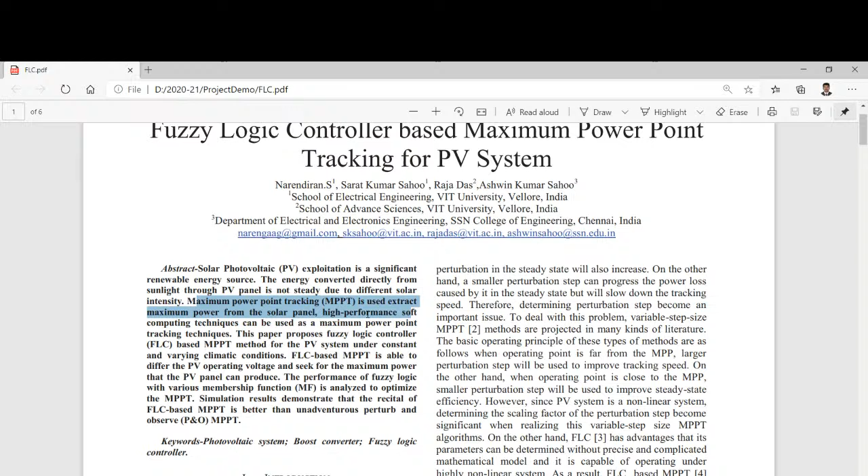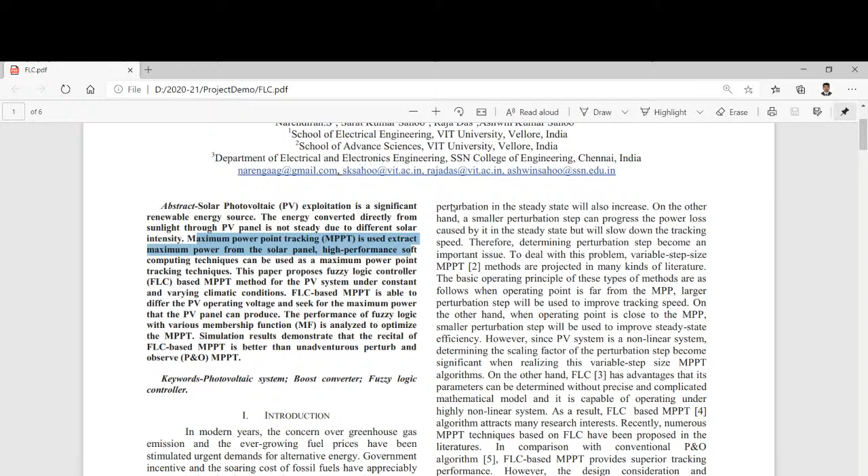When you apply the fuzzy logic controller, it will show high performance using soft computing. Here in the paper, you can see the fuzzy logic controller based MPPT method for the PV system under constant and varying climatic conditions.

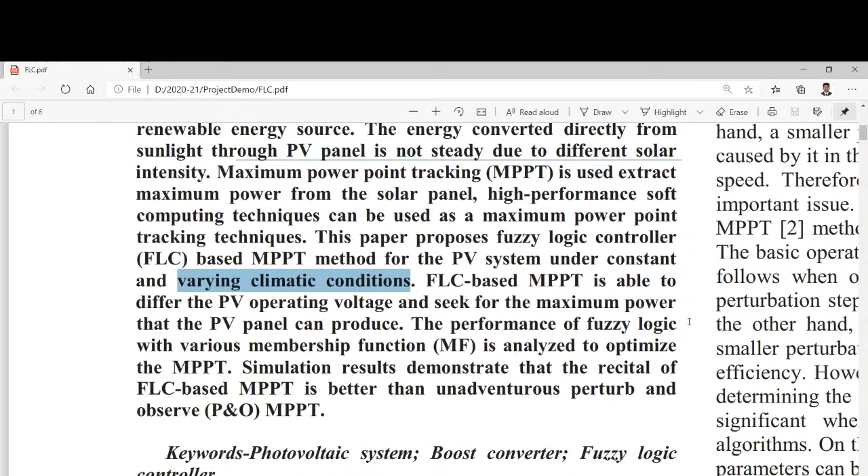Actually the irradiance we get from the solar PV panel is not constant, so in varying climatic conditions and in steady state climate, the fuzzy logic controller will effectively work. The fuzzy logic controller based MPPT is able to determine the PV operating voltage and power that the PV panel can produce, and here the performance of the fuzzy logic with various membership functions is shown.

You need to know what is a fuzzy logic controller and what is a membership function. If you recall, the fuzzy logic controller is not a programming language.

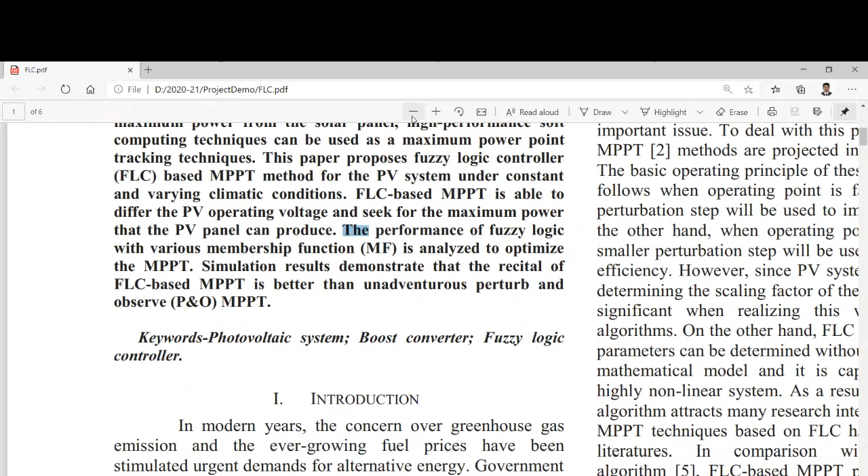It is purely a linguistic variable, though you use numerical equations too. You need to know how to analyze the fuzzy logic controller, how a human will think and take decisions, like when giving a rule-based system using membership, or when creating rules in fuzzification and defuzzification. According to that you need to create the rule-based system, and then it will effectively work.

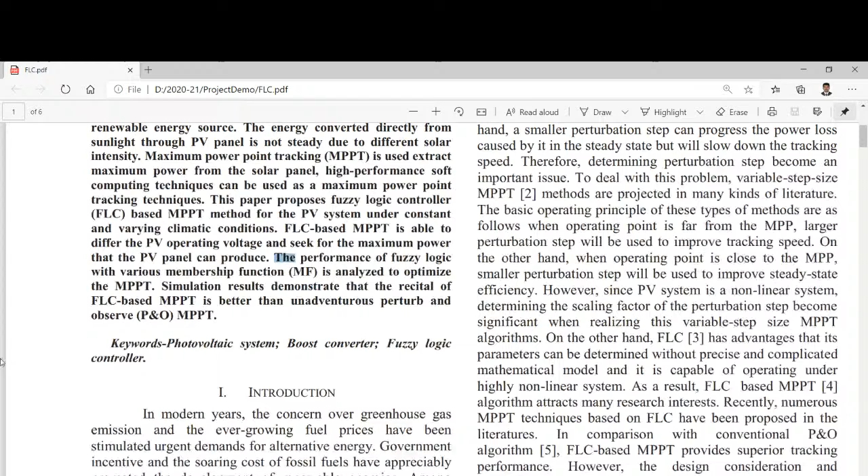They mention why we are going with the solar PV system in modern days, considering the cost of fossil fuels. So no need to go with government incentives - the soaring cost of fossil fuels has appreciably promoted the development of renewable energy sources.

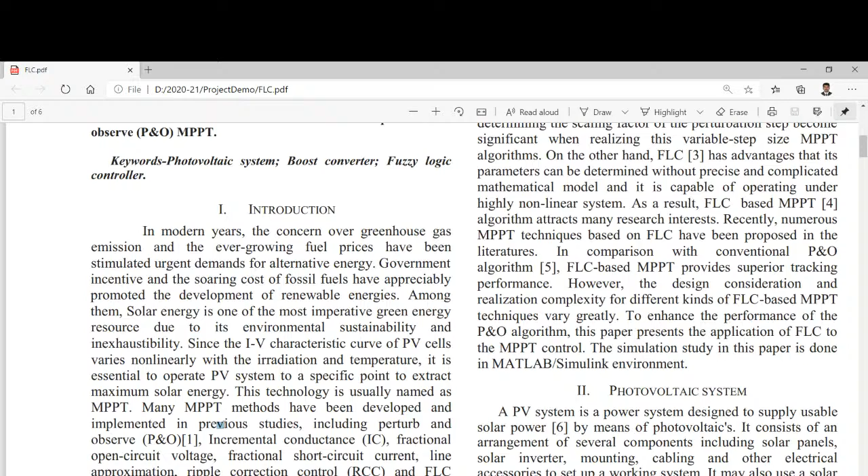Most of the conventional energy sources which we people are utilizing, we are importing from other countries only. So when we are importing from other countries, the prices of diesel or coal may increase, and that ultimately becomes a problem, right?

So in this case, if you go with renewable energy or solar PV panels, you get the benefit because solar energy is free of cost. You need to install the PV system, then you will generate the power - you don't need to pay any taxes to the sunlight, right?

So from here, whatever technology we are implementing, the fuzzy logic controller, they have explained why the fuzzy logic controller and what techniques we have.

Before this fuzzy logic controller, we have perturb and observe algorithm, incremental conductance algorithm, fractional open circuit voltage and fractional short circuit current, and ripple correction control. Apart from the fuzzy logic controller, these MPPT controllers - P&O, INC, fractional open circuit voltage or short circuit current - work at steady state, when you give constant irradiation.

But when you are working on variable conditions, when irradiation changes - whether 1000 or 800 or 500 - the P&O or INC algorithms may still work, but the efficiency will be very low when comparing with the fuzzy logic controlling algorithm.

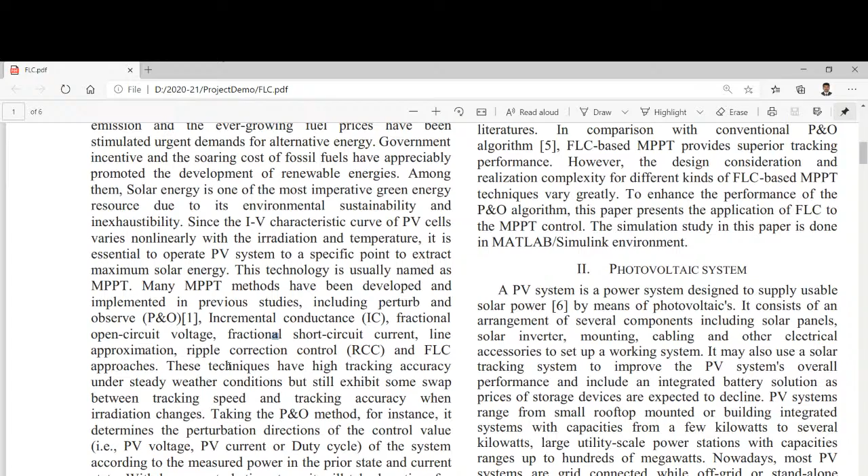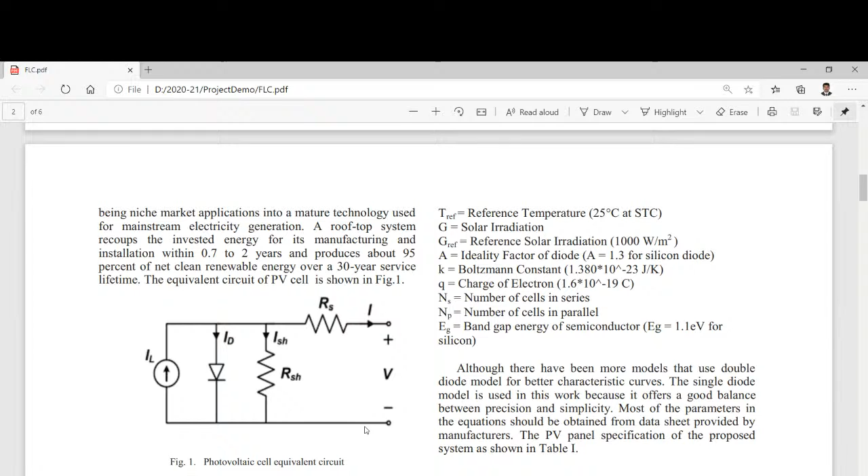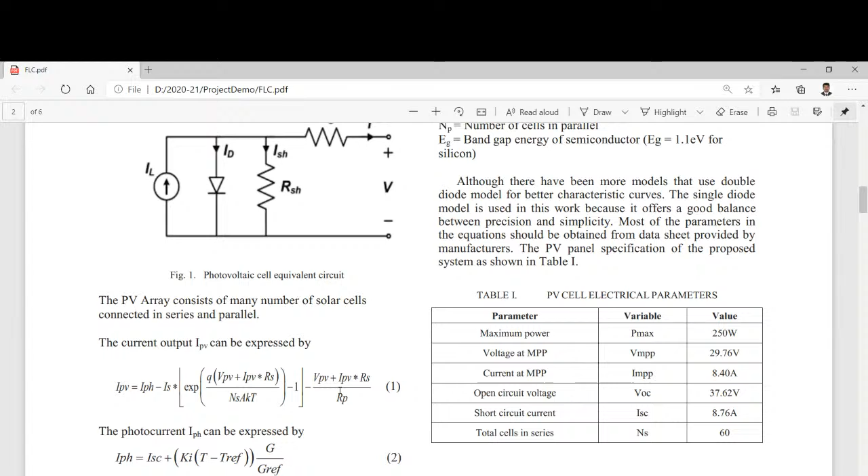If you observe the photovoltaic system, this is the equivalent circuit of the photovoltaic PV panel. Through this equivalent circuit, they generate a mathematical equation for photovoltaic current, and they also give the PV cell electrical parameters.

Suppose you need to work on your own PV panel. Now you have some idea to implement either a 1 kilowatt PV panel, or 2 kilowatt, or 3 kilowatt PV panel.

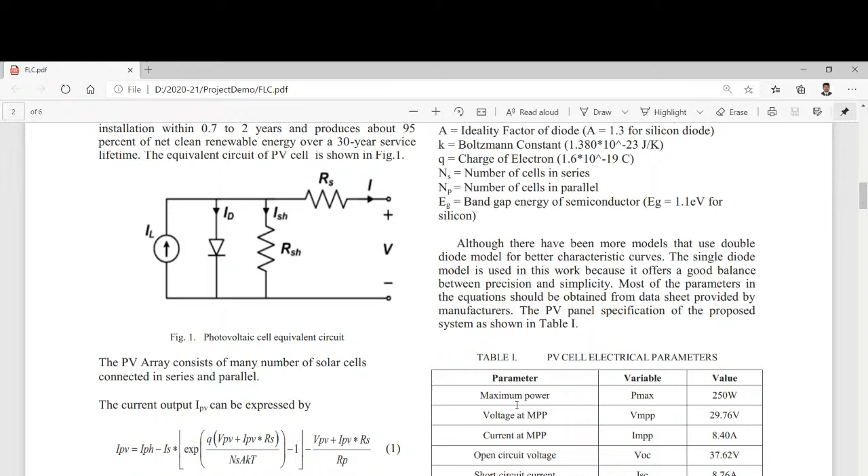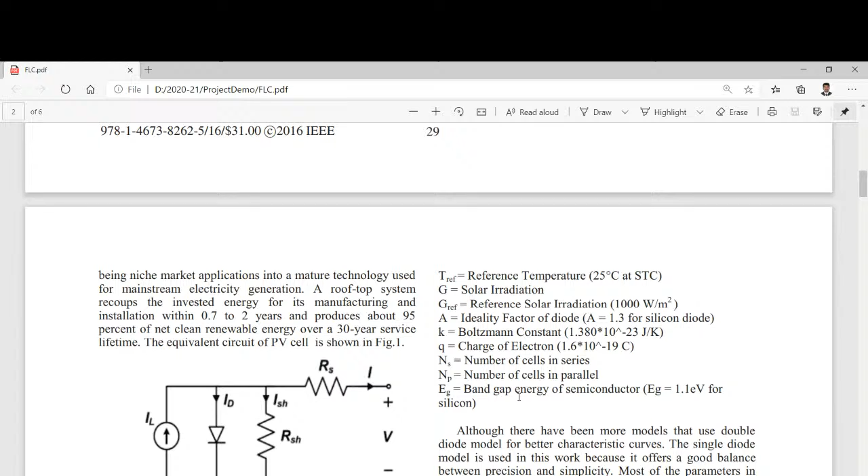You have some idea, then according to that you need to plan the PV panel parameters - how much inductance you need to take. This PV panel, we get from solar, we get DC electricity only, not AC. The photovoltaic energy is converted into electricity based on the PN junction diode principle. If you know the PN junction diode operation, through that only the photovoltaic energy is converted into electricity, and through that we get DC only.

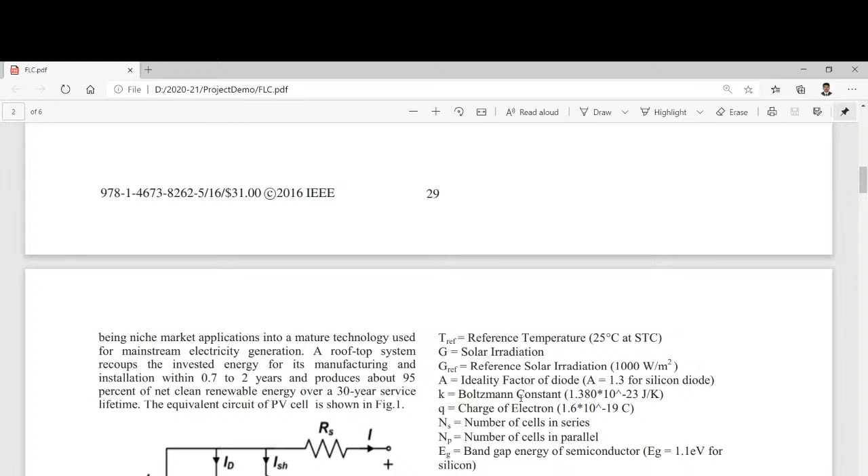But if your requirement is more, say you need 230 AC supply, but due to climatic conditions you get very low power, in that case you use an integrated converter or power converter - either DC-DC converter topology, isolated or non-isolated. Whatever the converter topology, here they are proposing the basic DC-DC boost converter topology.

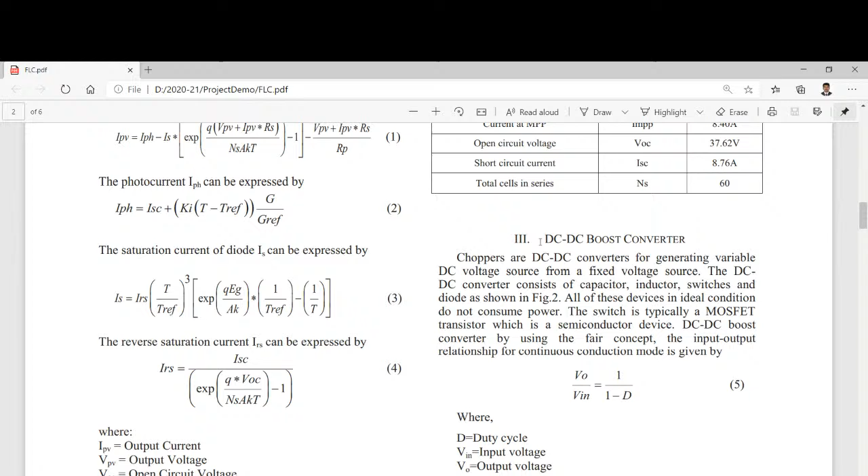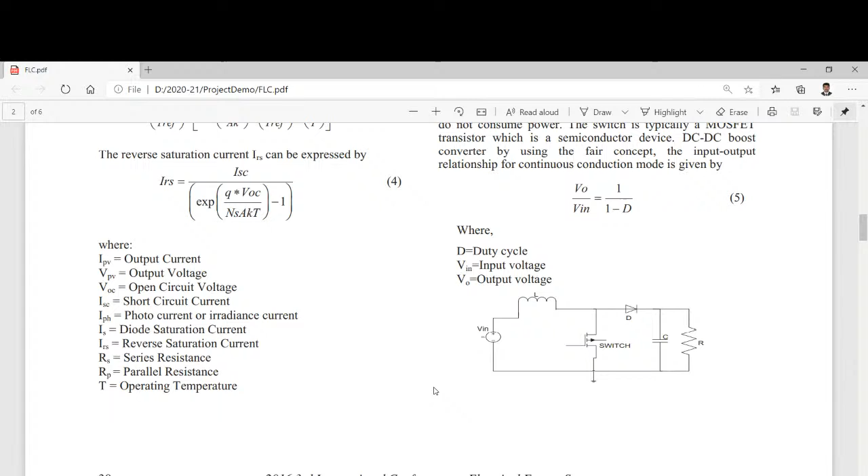By using this DC-DC boost converter, this DC-DC converter topology is a non-isolated DC-DC converter topology. When we send power supply from the source to the load side, the output voltage is always greater than the input voltage. By using this power switch or power electronic switch, we control the flow of power as per our requirement.

Here they designed for 250 wattage - the maximum power they get from the PV panel is 250 watts, and they give the voltage at maximum power point for whatever condition. When designing the PV panel, you need to know the open circuit voltage. If you work on a 250 wattage PV panel, in real time if you need to purchase one in the market, it may cost around 4,500 to 5,000 rupees.

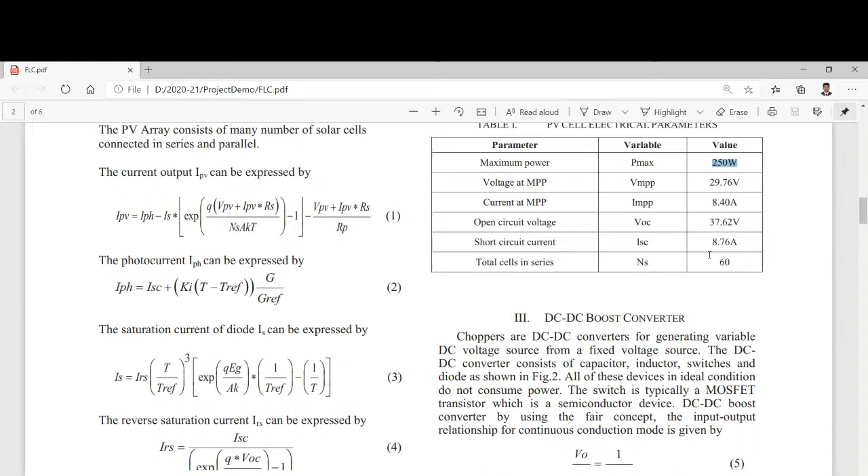So if you need to implement a 250 wattage PV panel or work on this type of product in real time, and you need to reduce the cost but keep the same efficiency, you need to think and focus using some IEEE reference paper, then you can work easily here. And in this case, the DC-DC boost converter, we know very well.

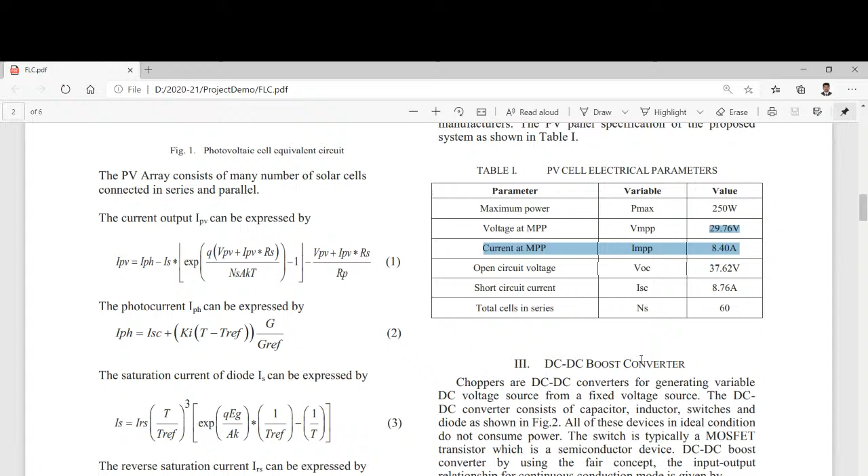In this solar PV panel design, the open circuit voltage mentioned is 37.62 volts, and the voltage at maximum power point is 29.76 only. Even though the open circuit voltage is 37, the maximum for a 250 watt PV panel, even if you give irradiation temperature of 1000, you may achieve only 29.76 volts at maximum power point condition. So when you get 29.76 volts at peak irradiation time, then your solar PV panel or fuzzy logic controlling technique, whatever you are proposing, it will work effectively in this case.

So for the DC-DC converter topology, you know the mathematical equation - here they give V naught by V in equals 1 by 1 minus D. So V naught, the output voltage, is always greater than the V input voltage in the DC-DC boost converter topology. So they give here, and they are preferring the MOSFET switch - at the output you will get voltage more than the input voltage.

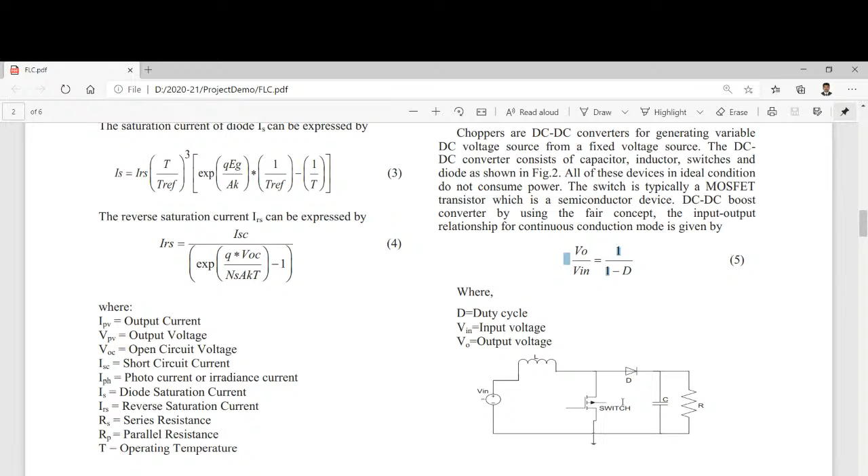This input voltage you take from the solar PV panel - 29.76 volts you take as input from the PV panel. Then you need to improve this 29.76 voltage as per your requirement at the load side, this is the R load. You need to convert this 29 or 30 voltage into either 150, 190, 160, or 90 voltage - according to that you need to plan here.

But when you are working on power electronics, now you know the mathematical approach - if you turn on the switch, what will happen? The inductor will try to charge here, and you will get a closed loop path, right? Here you will get one closed loop path.

You people will get a closed loop path here. If you are turning on the switch, what will happen? Inductor will try to charge here. When you turn off the switch, this is the closed loop path, and the inductor releases the energy. Like this you will get charging, discharging, charging, discharging.

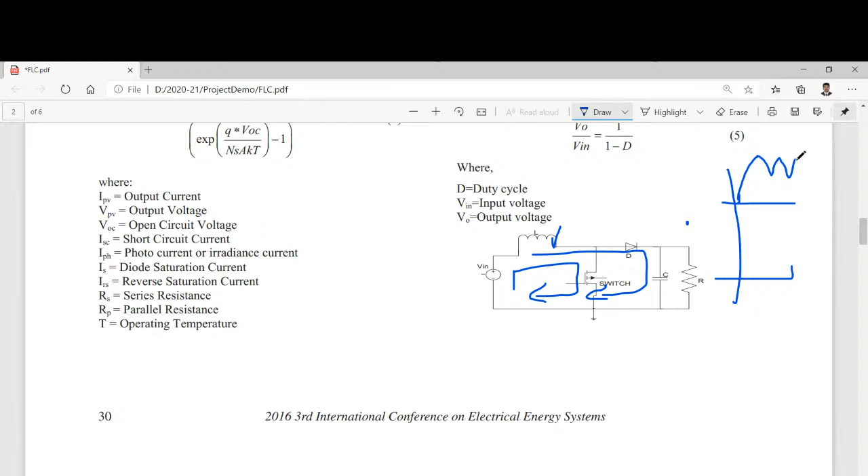But from this switch you generate the duty cycle from the fuzzy logic controller only. From the fuzzy logic controller you are generating the gate signals. So whatever the duty ratio, whether 50% or 60%, you need to observe the ripple condition here. If you are getting more ripples, then you are not sending quality power. You need to minimize the ripples when you are applying the fuzzy logic or whatever the condition.

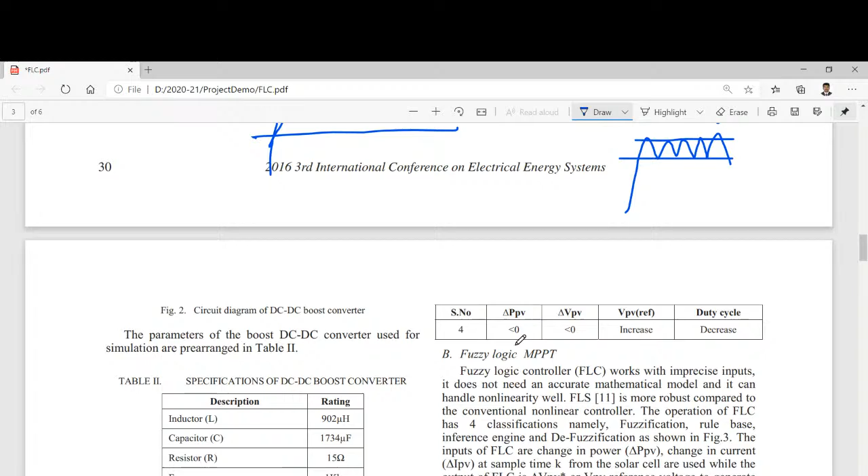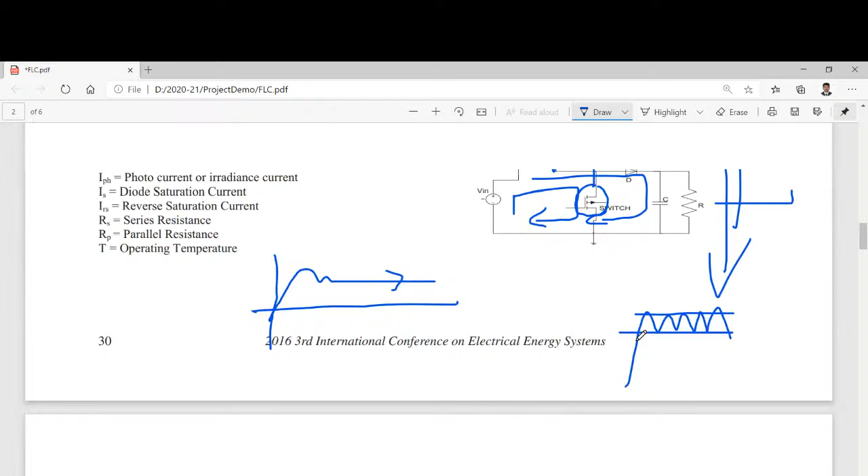You need to get like this. So if it is voltage or current, you need to apply like this. And here they have given the fuzzy logic MPPT also, and in this description they have given the inductor capacitance value, resistance value. How you will calculate the resistance and the inductance - you have some mathematical formula. When you apply KVL or KCL, you will get the mathematical formula.

So you can either give trial and error, but if you are working on a real-time product, then you need to proceed with the exact mathematical operation. It will be a good one, for this inductor, capacitance and resistor.

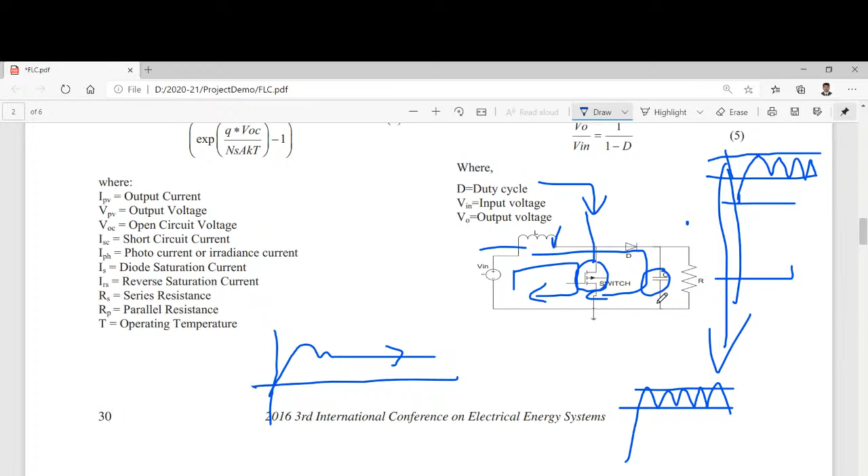So why are we keeping the capacitor before the load? Why are we placing the capacitors? To minimize these ripples. We are placing the capacitors in this case to minimize the ripples here. By using the capacitors, we can minimize the output ripples or output current ripples.

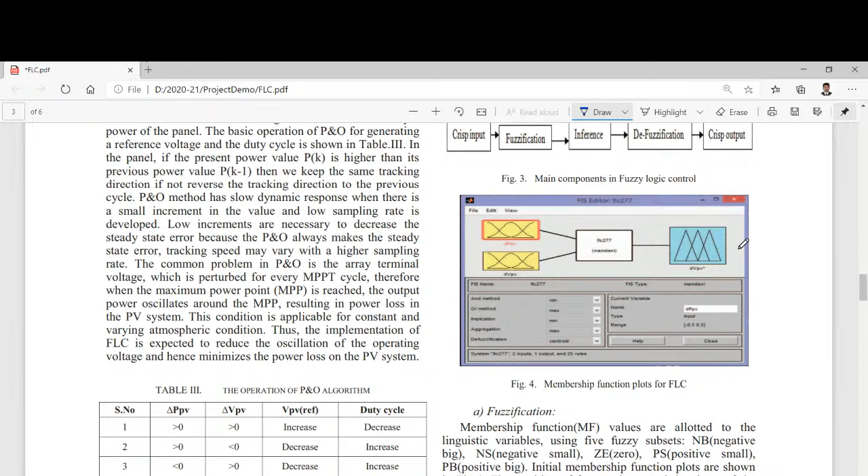And here they have taken the error and change in error condition, and they are preferring the Mamdani type only. Mamdani type, and the output voltage delta Vpv or voltage.

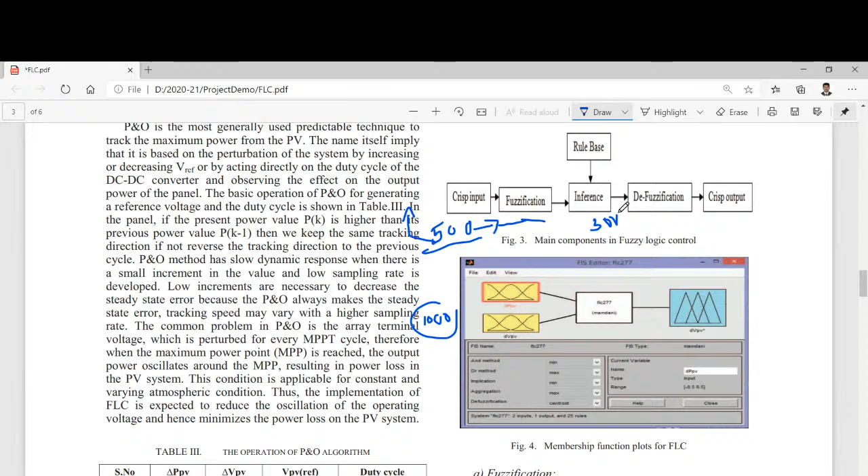Suppose at morning 10 a.m., for simple understanding, the irradiation from the solar we are getting around 500 - just take an assumption of 500. After 2 hours at 12 p.m. you may get 1000 irradiation. When you are getting this 500 irradiation and the open circuit voltage 29 point something or 36.72, you will get maximum 30 voltage nearly. When you are getting solar intensity 500, you will get that 30 voltage maximum from the PV panel. Will you get 30 voltage maximum? Definitely not, right? So definitely we can't achieve 30 voltage.

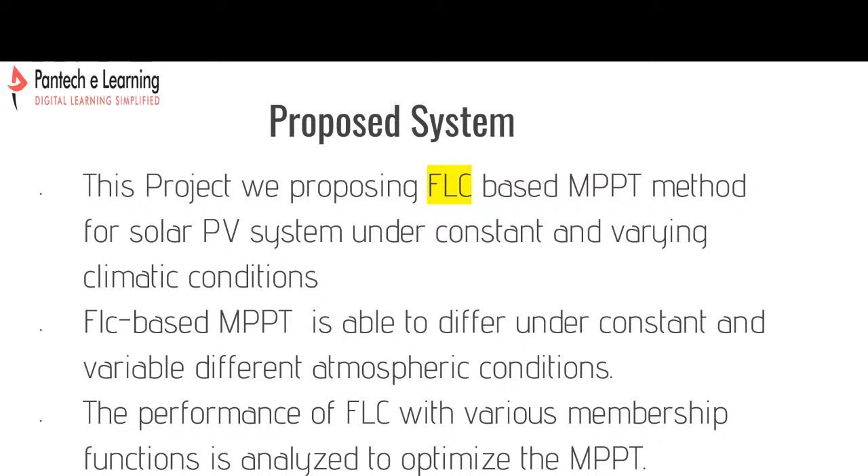In the solar PV system we have different types. If you are simply working on 250 watt or 1 kilowatt, you need only 3 PV panels. But if you are working on a centralized PV system like a big grid connected system, mini grid, or standalone PV system application, the fuzzy logic controller needs to work differently since in a big centralized PV system you have a number of PV panels.

In those systems, PV panels are connected in series and parallel manner. When you connect a number of panels in series connection, the shadow problem will occur, and you will get PV panel insolation mismatching problems. When connecting panels in series, you can't get the same irradiation and temperature from the first PV panel and the 10th PV panel - you will get different irradiation. So in that condition, you need to tackle where you are getting exactly the maximum power.

This type of algorithm is more useful when humans face difficulty understanding the problem and more complexity arises. In that case, the fuzzy logic controlling algorithm will effectively work here.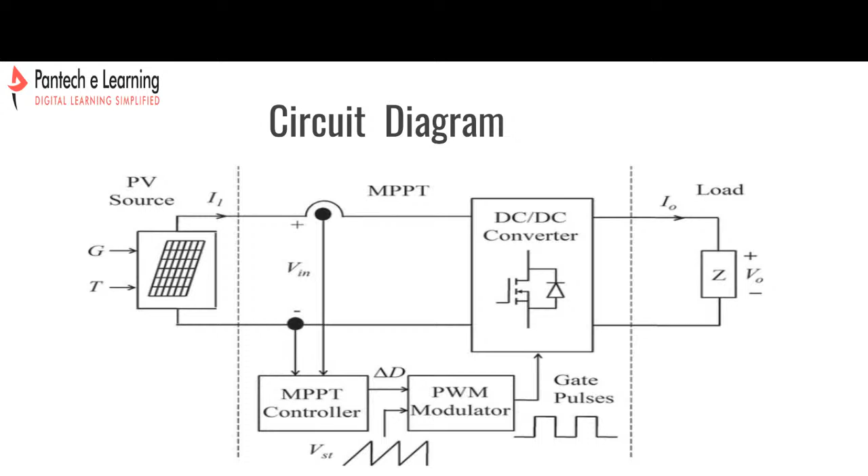Then we are connected to a particular load here. This is the circuit diagram of a fuzzy logic controller based MPPT solar PV system. This is the control diagram, and here the block diagram you can see here.

The block diagram, suppose whatever you are proposing in the Simulink model, if you are working on a particular product, the Simulink is a physical model actually. So whatever you people are imagining, you are designing that model in the simulation. After designing and testing that model in open loop and closed loop condition, then you need to proceed with the hardware.

So you need to analyze the test cases. You need to work on 2, 3, or 5 to 6 test cases. Then when you are getting confident, this particular product we can implement in hardware. So then you can go with the real-time prototype board hardware also. You need a PV panel and the DC-DC converter, step-up converter.

Then here you are connecting with one R load, and here the fuzzy logic controller, whatever we are proposing now. So the same fuzzy logic controller, when you are working on hardware, you need to go with the microcontroller techniques. In that microcontroller techniques, you need to dump whatever program you are designing, whatever the rules.

In simply prototype board manner, this fuzzy logic controlling algorithm we can't implement. But in a real-time product, definitely we can implement the fuzzy logic controller, and this is the microcontroller only. In this microcontroller, we need to generate the gate pulses.

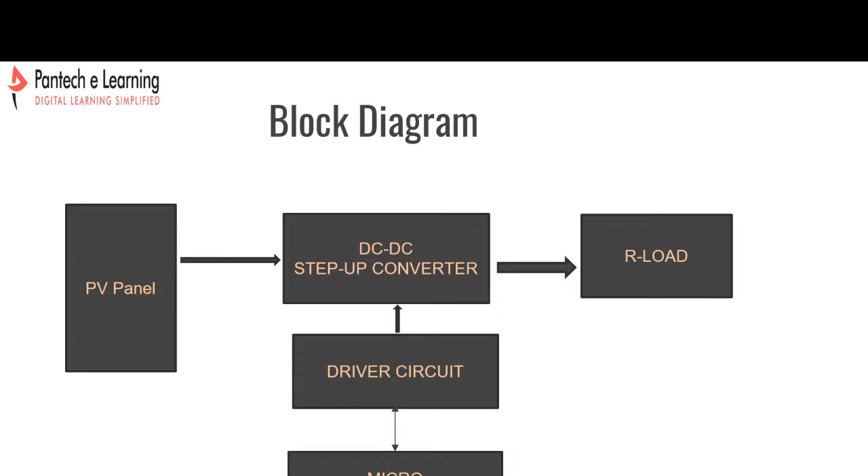Then you can measure through the CRO, you can see the waveforms also, and the DSO also you can prefer. So then according to your requirement, you can do the prototype board this type of models. And the algorithms here, we are preferring the fuzzy logic controller, right? So the fuzzy logic controlling algorithm is the main thing here we are doing.

Pre-processing, so we need to set the rules. Suppose for simply understanding the fuzzy logic controlling algorithm, how it will evaluate and how it will track the maximum power point, you can see a bunch of people, you people went to a good restaurant.

This fuzzy logic controller was proposed by Lotfi Zadeh, a professor at an American university, around the 1960s. When he proposed it, he was observing his surrounding areas.

Mostly in the United States of America, people do not cook food daily. They often go to restaurants from morning or afternoon, and will not cook on a daily basis. But in India, we people cook every day, right?

So he observed the people, then gave a best example. When a bunch of people go to a good restaurant, at the end, when you are leaving, you try to pay the tip, at least when you are satisfied with the food and feeling more comfortable. If you are enjoying the experience, you give some tip to the people. So when you are trying to give the tip, you analyze something, right?

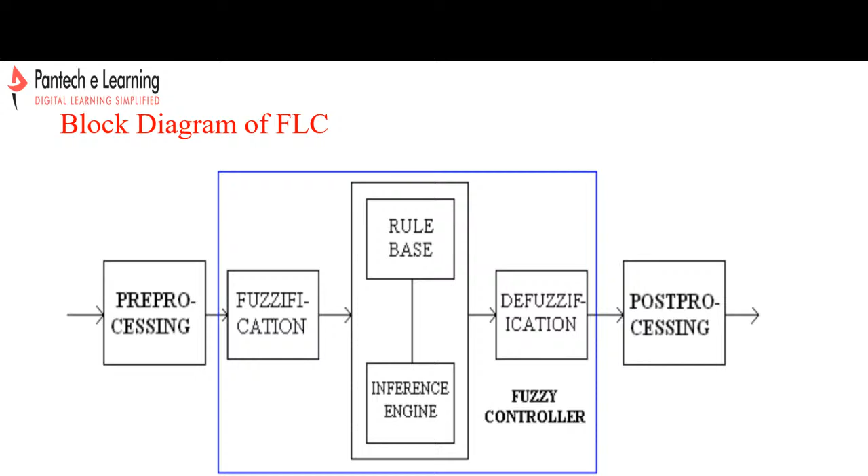So like we are thinking now, when you have two options, service and quality of food, as a human we take the decision on the spot. We are taking the decision and giving a tip according to the situation. Similarly, when you give a rule-based system in the fuzzy logic control algorithm, when you create the rules, the machine automatically gets the capability to take decisions according to the situation.

When the irradiation condition is around 1000 or 500 or 800, how will it act, how will it take the decision, how does it get the duty ratio for your particular power electronic switch or power converter - it will take the decision here. And here are the steps you need to follow.

Identify the inputs and their range, and name them. First you need to identify the inputs. When you are creating the fuzzy system, you need to identify the system, then identify the outputs and their ranges and name them. So create a degree of the fuzzy membership function for each input and output.

Suppose you have eaten or not - you have two options only, either yes or no. But when you are working on a power electronic switch, either yes or no means the switch will be on, which you can consider as 1. If the switch is off, you consider it as 0. So in between 0 and 1, you can create infinity ways - the rules you can create in infinity ways.

Then the machine or the PV system will take the decision on how to apply this depending on the irradiation. So the input fuzzy logic membership functions - the input to the fuzzy logic is given as a membership function, which is called a linguistic variable.

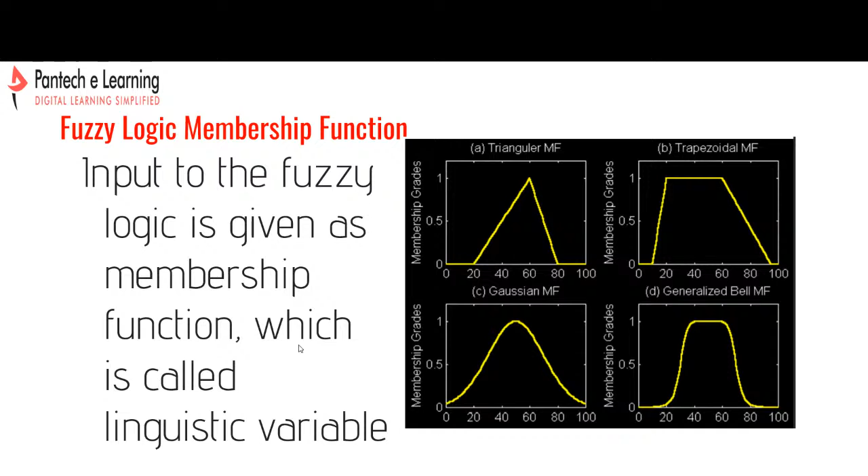In this membership function, we have different types of membership functions: triangular membership function, trapezoidal membership function, Gaussian membership function, generalized Bell membership function. We have different types of membership functions. Depending upon your wish, you can take the different type of membership function.

If you need to create more number of rules, that means your system becomes more robust or stronger, then you can go with increasing the number of rules. If you are working with a low wattage converter topology, then you can go with less number of rules in this case.

Suppose how you will turn on your fan at your home application. As a human, the fuzzy logic also in this case we can apply. If the humidity or temperature condition outside of your home is more, then you will increase the fan speed. If the temperature condition is very low, then you are decreasing the fan speed. So now you are taking the decision, right? According to the situation, the humidity or temperature conditions in the atmosphere at your home, you are taking the decision either to increase the speed of the fan or decrease the speed of the fan.

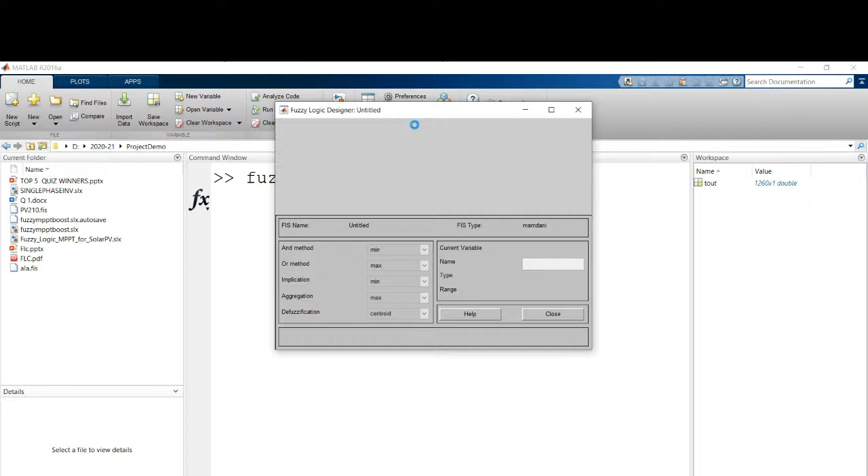You can see here, this is the fuzzy logic designer file. I will show how, for the 210 wattage PV panel, we are creating the rules.

In this file, first when you open the fuzzy logic designer editor, you need to give the names — input and output. Suppose in this case we are preferring two input variables. So you go to Edit, Add a variable, Input. Adding a variable input means you will get another input variable.

Now you can see here, this is V — you can consider this the solar input voltage. This is the solar input current, input voltage and input current. Then you need to get the duty ratio as output.

Here, in input one, you give the name V, meaning voltage. Input two, you give the name current. And the output, you mention duty ratio or D — D equals switch-on divided by switch-on plus switch-off, that's how you calculate the duty ratio. So then voltage and current.

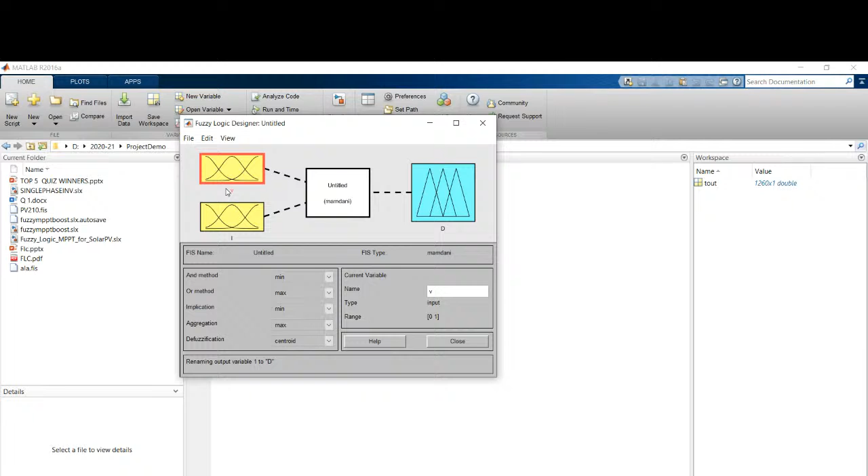If you are observing here, we have the membership function. If you double click here, now you can see the membership function editor. In this membership function editor, you can observe the details.

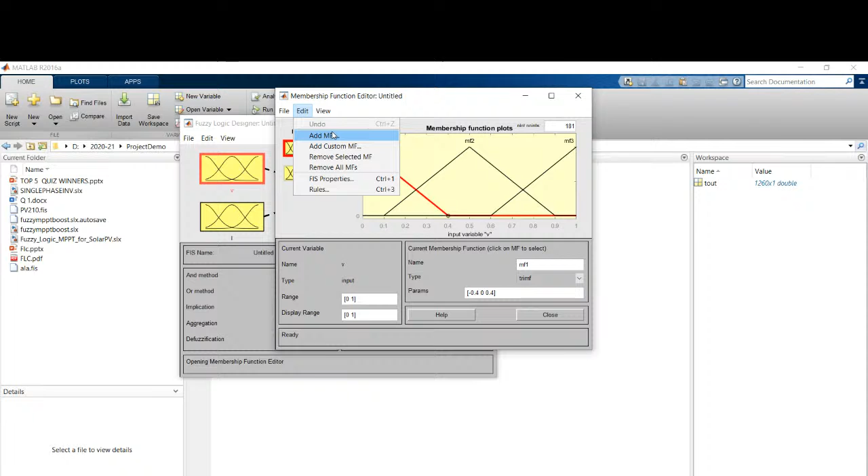So you can see here the membership functions. If you need 3 membership functions, you can select. If you need more, you can add a membership function, or you can remove all the membership functions here itself. Then if you need more, add membership functions. You have deleted all the membership functions. Now you need to edit the membership function.

Now you can see here which type of membership function you need to add: either triangular, trapezoidal, gbell, gauss, gauss-2, sigma, or dsigma membership function, according to your requirement. So in this triangular membership function, if selected, then the number of membership functions here you have selected 5. Apply and OK.

Now you can see here you will get the 5 membership functions. So in this membership function, you need to fix the range actually. What is the voltage range? What is the current range you need to fix? So then you need to give negative big, negative small, negative medium, zero, positive small, positive big. In between -1 to 1, we can create infinite rules here.

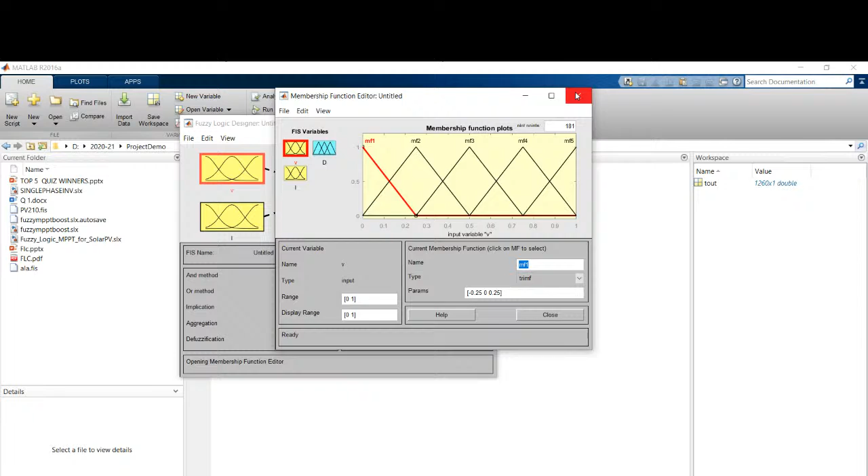So the membership function 1 name, here you can change. And for membership function 1, what is the range also here you can adjust, or parameter range also you can give. So here I will show, and whatever data we created, I will show it.

Wait a second. Now you can see here the file. When you are creating the rules, import from the file. So the 210 wattage PV panel rules, how we created, I will show here.

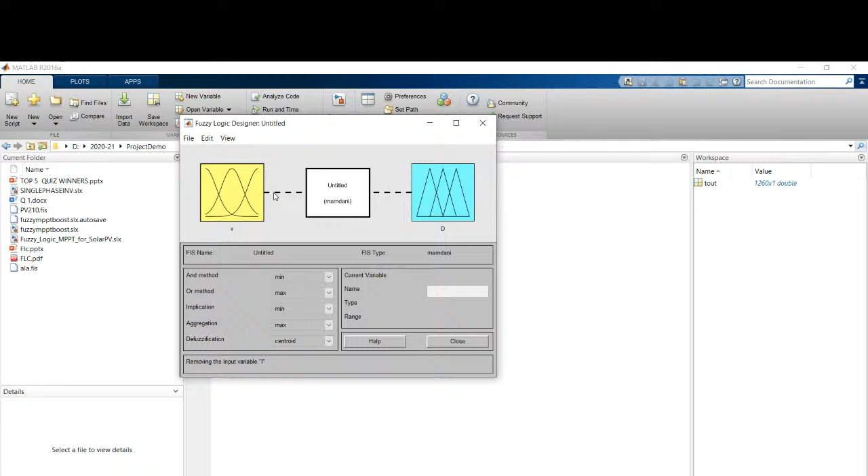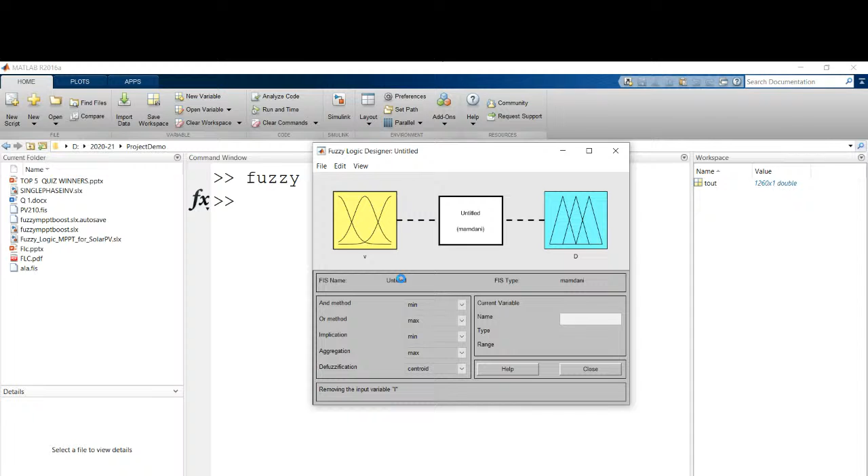So if you are creating the fuzzy file, you will get the file in FIS format only. Fuzzy file you are getting: PV210.fis. So open the fuzzy file. So you have imported the data to this fuzzy file.

Now you can see here what I said: voltage, current and duty cycle. Now in this case you can see here how we created the rules. The fuzzy logic rules you can see here.

So in this case the membership function type, trapezoidal membership function we have taken, and the range here 0 to 37. Voltage range, actually the input voltage range, why specifically we have taken range 0 to 37, I will also tell. Range here, the voltage range 0 to 37 and the low voltage range.

So now you need to select the low voltage range: 0, 0.5, 0.46, 10.09. And the medium voltage, what is the medium voltage? The medium voltage range here you can give your requirement; how you are thinking, 9, 15, 22, 29 we have taken. And the high voltage range 28, 31, 37 we created. This is the voltage range actually, 0 to 37, the PV voltage range we are getting.

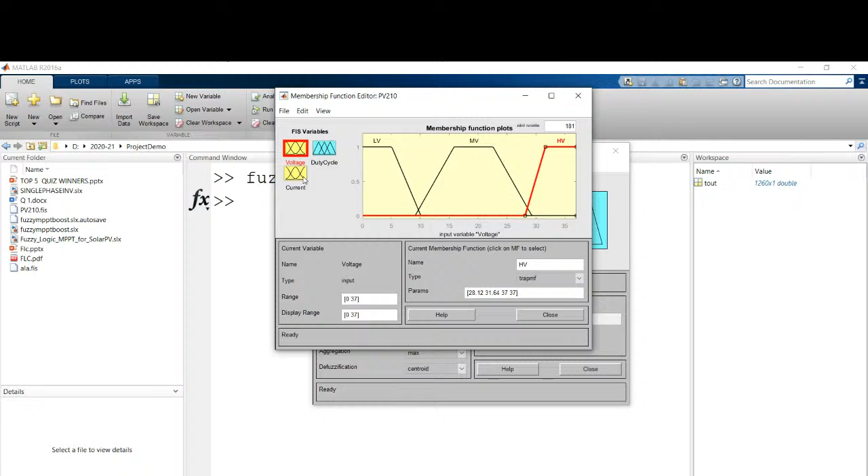And the current here you can see, the range of current here, 0 to 8 we selected. 0 to 8 we selected: low current, medium current, high current.

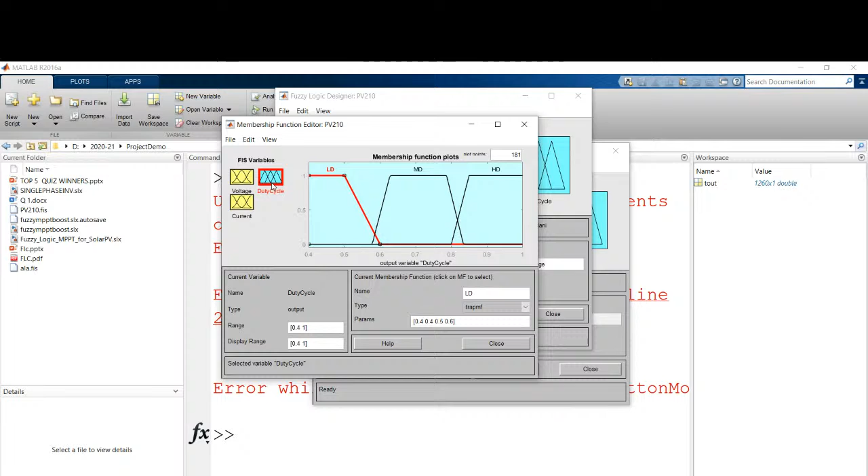Voltage and current, according to the situation, according to the irradiation and temperature you people are giving, the voltage and current will vary, but you need to get the maximum DC link voltage. From this DC link voltage you need to get the duty ratio. So this duty ratio here we are giving.

Now you can see here, I will export whatever data we created, import and export to a workspace. Here we have file, export to workspace. So now this data directly went to a Simulink file here.

So now here there is a fuzzy MPPT, I will show here. Fuzzy MPPT solar PV system, I will show the toolbox here. Wait a second. The PV panel, 210 wattage.

In that PV panel, what is your open circuit voltage? You need to go through that open circuit voltage. The open circuit voltage here we are given is 37. 29 is the maximum peak power point I need to achieve. Maximum voltage I need to achieve, 29 voltage I need to achieve. According to that, you have created the fuzzy logic rules in this case.

So here I will show the fuzzy MPPT DC-DC converter topology, and in this case you can see the rules also, and you can see the graph also, the surface viewer graph also you can see in this case.

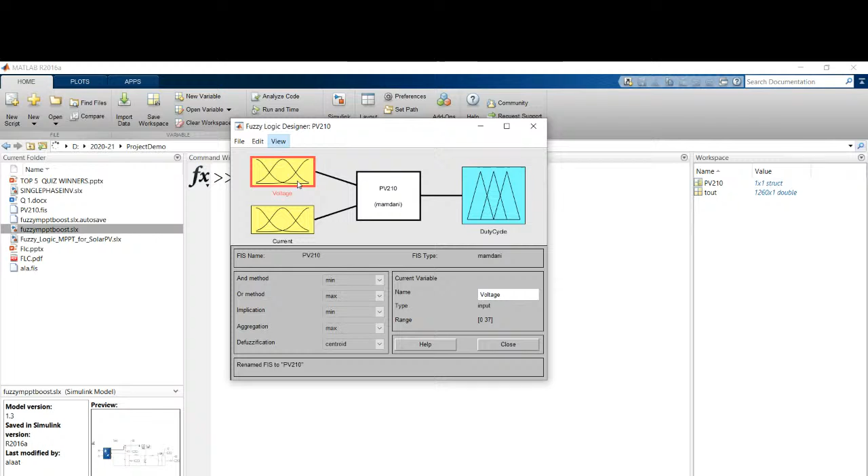Well, wait a second. So actually it's taking time.

This fuzzy logic and DC-DC converter we did, then the MPPT. First we need to create the rules. Then in the Simulink library browser we have the fuzzy logic toolbox. In that toolbox we can take the fuzzy logic controller and the fuzzy logic controller with rule viewer block also.

Whatever the name, when you are saving the file after creating the rules, you can save it with the PV panel 210 wattage name, or with your own name. You can give whatever variable name, whatever file name, and it will consider that. When giving that fuzzy file name, you need to observe whether that fuzzy file is available in the current folder or not. If it is available, then you can import that data very easily.

So now you can see here the fuzzy logic controller rule viewer I took here.

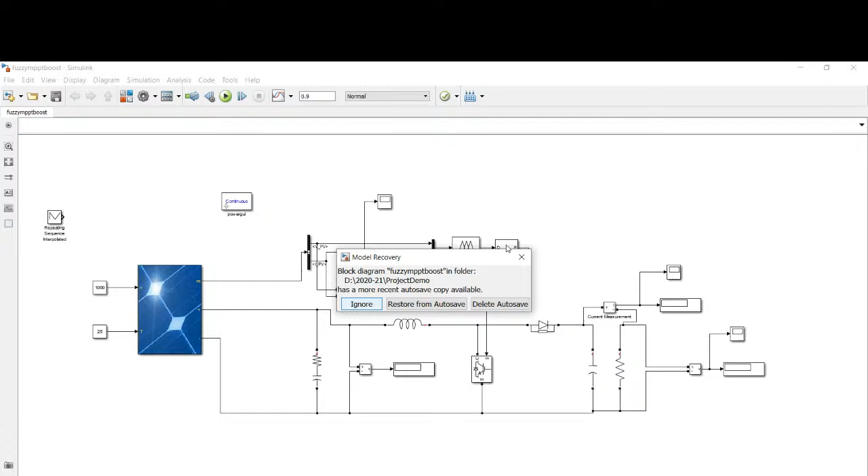You can see here, this is the boost converter topology. In this boost converter topology, the PV panel I selected from the library browser. We can select the PV panel, and you can see how I selected a single panel only here, 210 wattage PV panel.

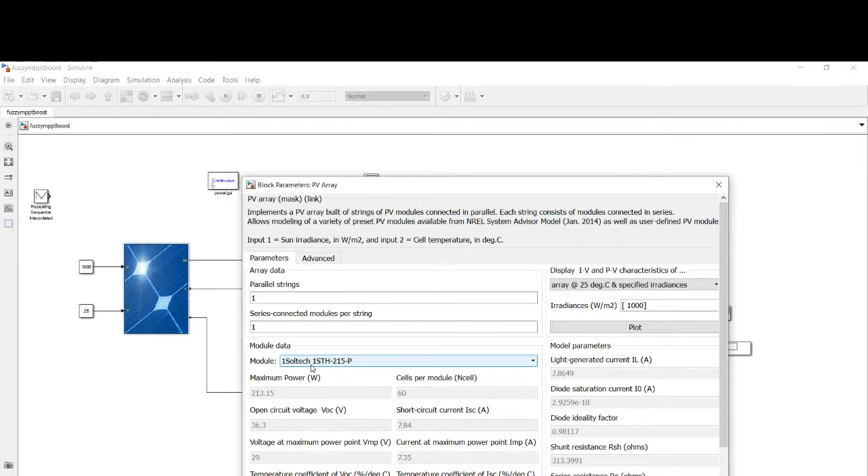You can see here the block parameters, module 1Soltech 1STH-215-P. So here 213.15 wattage. When selecting the data sheet, I gave 1000 irradiation, and in the array characteristics, parallel strings also one panel in series, one panel in parallel, 213.15 wattage.

Open circuit voltage, how much? 36.3. How much did I give in the fuzzy logic controller input voltage? The range of voltage 0 to 37 I gave, 36.3. And the number of cells in modules, in the IEEE paper also, 60 cells they gave. And the short circuit current 7.84, and the current at maximum power you need to achieve 7.35. So open circuit voltage 36.3, but you will achieve 29 voltage only maximum.

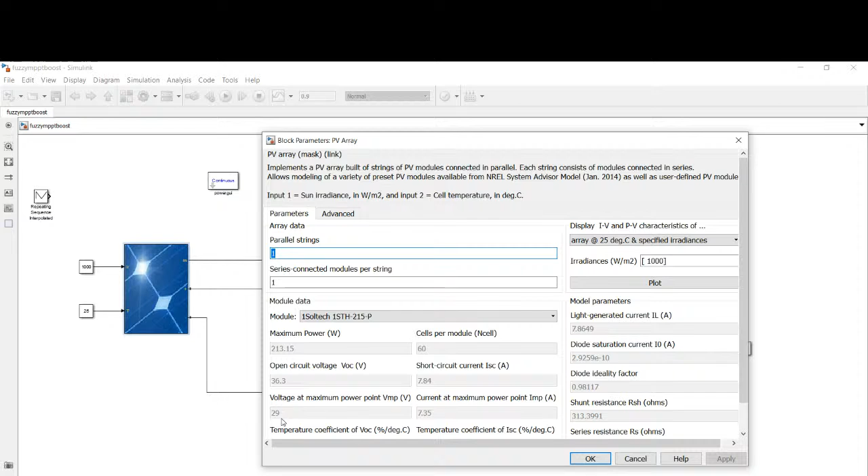So when you are giving the 29 voltage under different irradiation conditions, if you are getting very low voltage also, you can improve that voltage by using this DC-DC converter topology.

And here we have the measurement block. By using this measurement block, I selected the bus selector. By taking the bus selector, when I connected here in this measurement port, the PV panel voltage and PV panel current, I connected and gave as input variables. So 2 input variables I gave to this fuzzy logic controller.

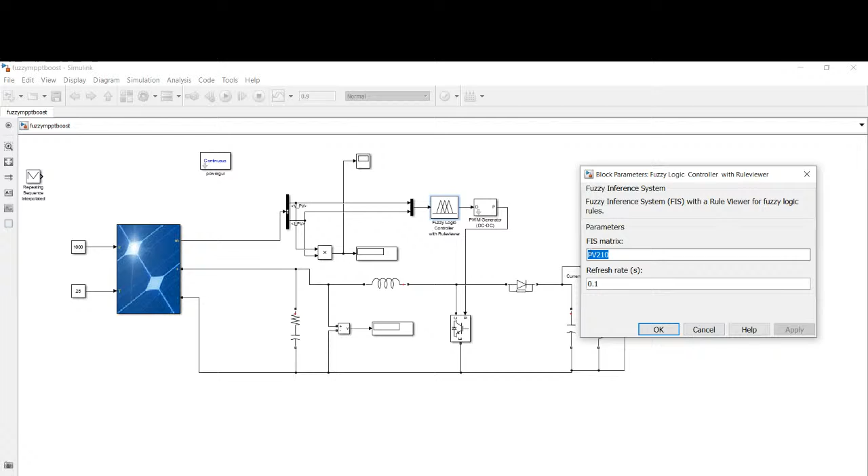This fuzzy logic controller block also I took from the library, and here I gave the fuzzy file name PV210. So whatever file name, however you are creating the rules, the same file name you need to give here itself. Then the pulse width modulation generator here we took, and 5 kilohertz switching frequency we preferred, and the inductance and capacitance, and one R load we connected.

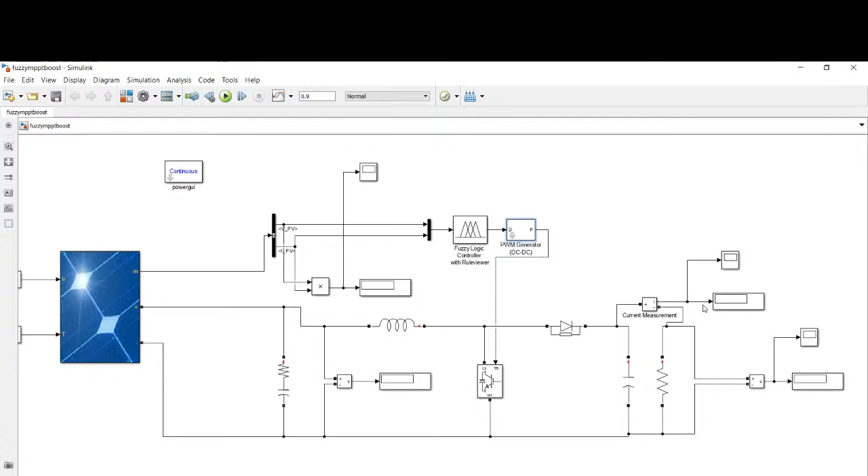If you run the simulation model, you will achieve near to 210 wattage. From the PV panel you need to achieve 210 wattage here. I will run the simulation.

So without training or without importing the data, if you run the simulation, you will get some error value. You can see here, it's compiling. Wait a second.

When we are compiling the model, then it will run, and here you can observe directly. What is the advantage of the fuzzy logic controller with rule viewer versus only fuzzy logic controller? When you take the fuzzy logic controller with rule viewer, however you are creating the rules, the image directly will come automatically.

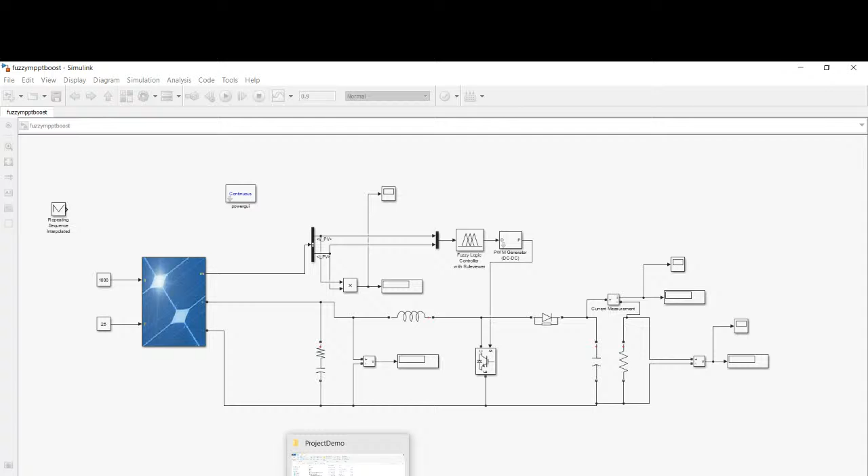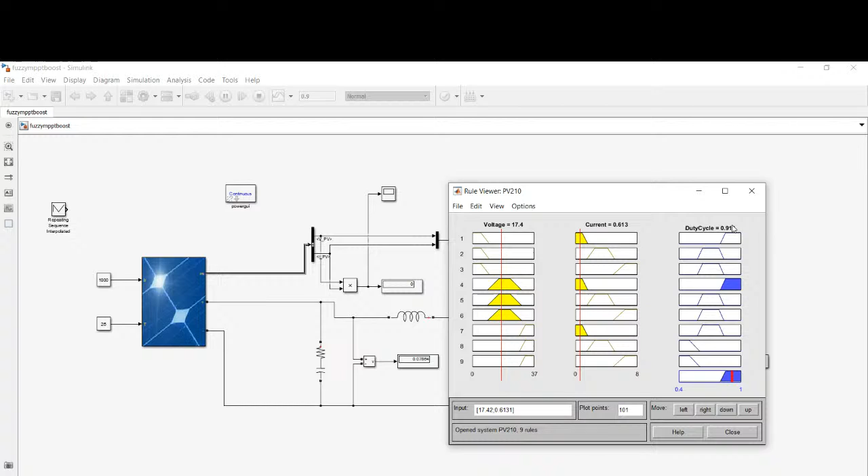So if you are adjusting the rules in the rule viewer, the voltage, if you are getting 17.4 and current 0.613, at that case duty cycle ratio, 90% of the switch you are turning on. So then it's increasing.

Now you can see here the PV panel. You people will get the voltage here. It started to run. This is the rule based view system.

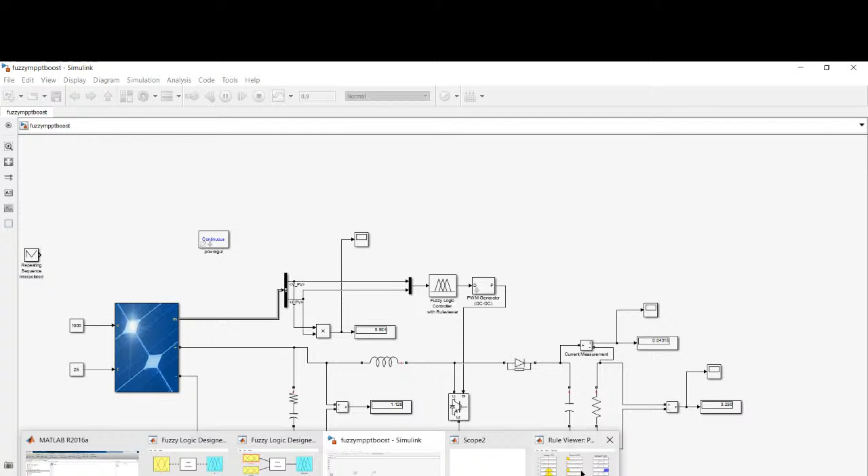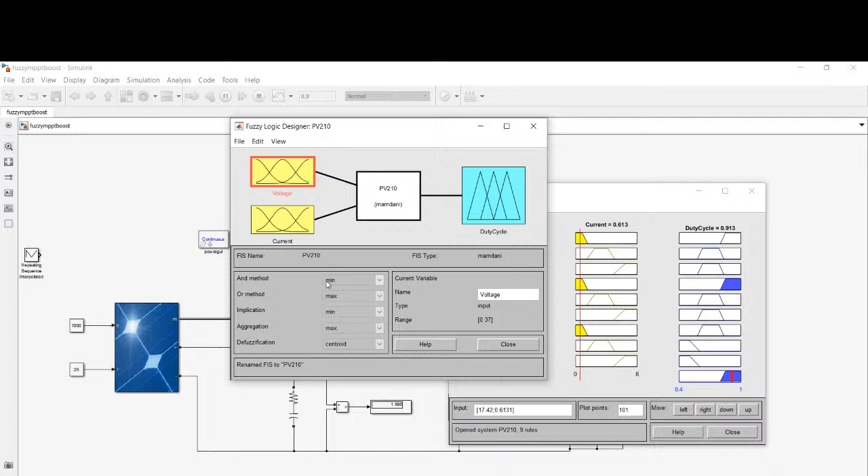And the surface graph also you can see here, from here view, surface. You can see the rules and the PV panel surface view here, and the PV power here. The PV power here, we will see only 4% it has run.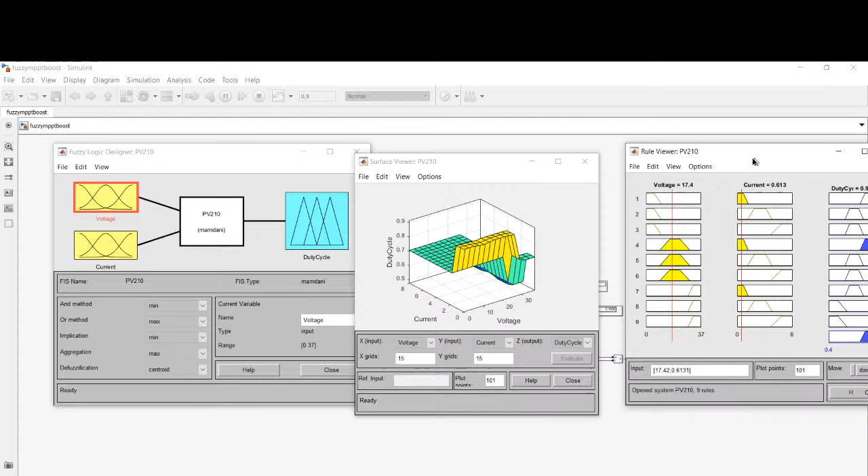This is the surface viewer graph and the rule-based view system of a 210 wattage PV panel. If you are working on a big PV system, either 5 kilowatt or 2 kilowatt, now you will get some idea. So whether it's a 2 kilowatt or 3 kilowatt PV panel, accordingly we can change the rule-based PV system, adjusting voltage, current, and power as needed.

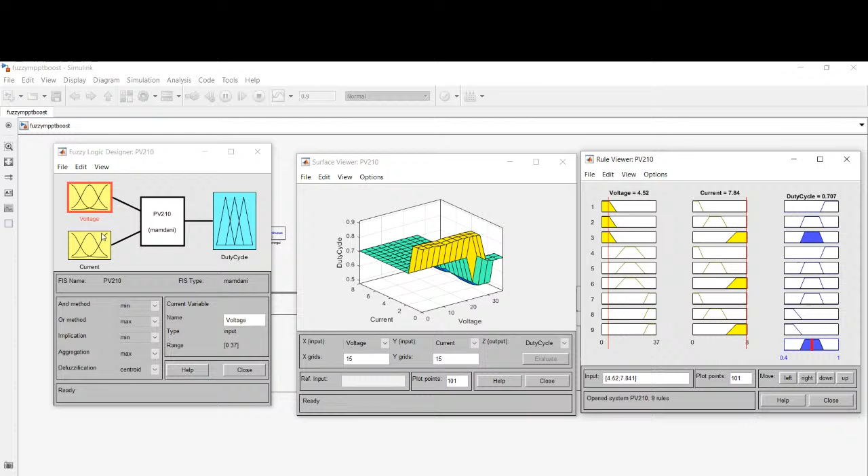According to that we will adjust the rules. If you are taking 7 rules, you can create up to 49 rules, or 25 rules also you can create, depending upon your power rating and converter topology. This is a simple non-isolated DC-DC converter topology. If you are working on an isolated DC-DC converter, the same concept applies, but now you need to write a new IEEE paper since you're doing research work.

If you need to do something new, you can propose a fuzzy logic controller based MPPT solar PV system by implementing a new isolated converter, such as flyback or SEPIC or any advanced converter topology. When designing that converter topology, you need to justify it, and if you justify it mathematically, it will be even better.

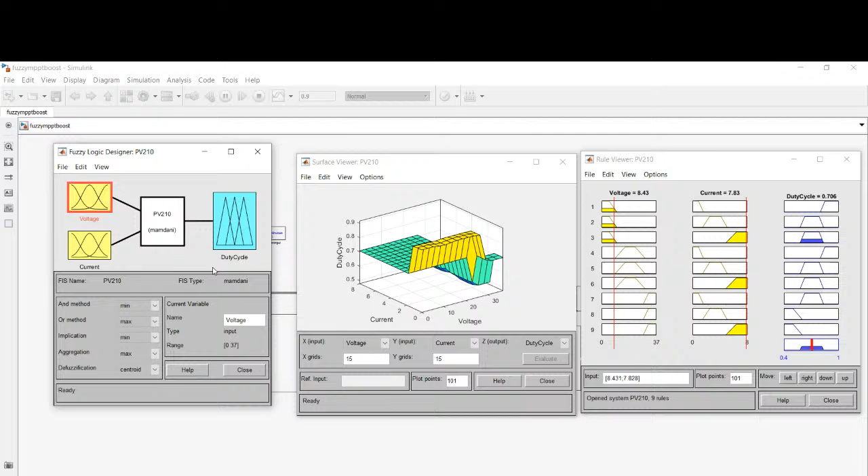You can see here the rules: how we created low voltage, medium voltage, high voltage, low current, medium current, high current. According to this, if voltage is low and input current is low, then the duty cycle is high. If voltage is low and current is medium, then duty ratio is medium. If voltage is low and current is high, then duty ratio is low.

You can also take negative big, negative small, positive big for error and change in error, as I showed in the IEEE paper. According to medium voltage, you can apply low current, medium current, or high current, giving low duty ratio, medium duty ratio, or high duty ratio accordingly. Then if you select high voltage with low, medium, or high current, you get low, medium, or high duty ratio respectively.